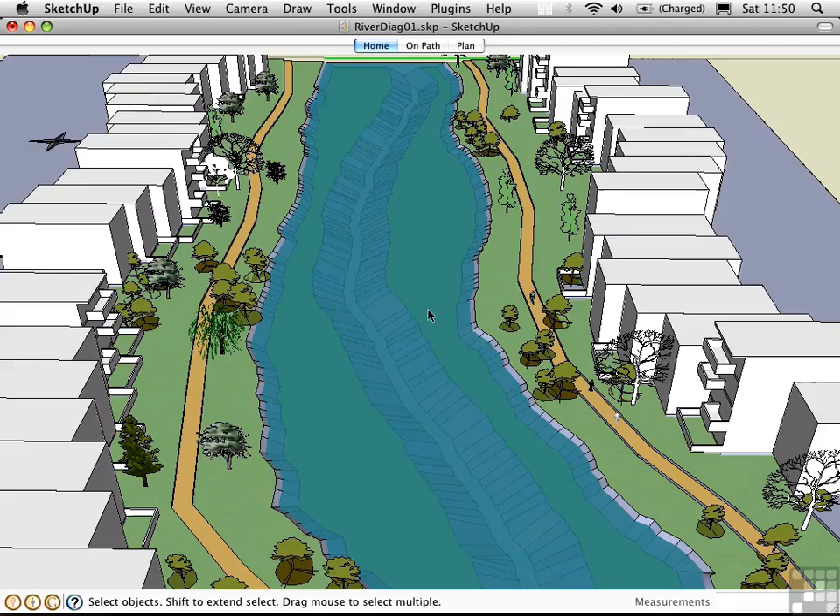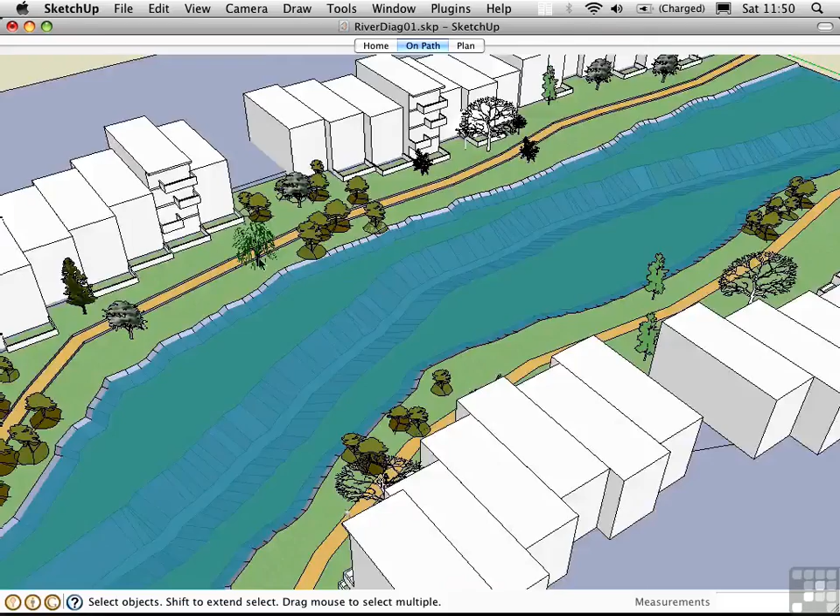As your models grow in complexity, there will come a point when the on-screen performance is degraded. And you can see this a little bit here in this model where as I pan and orbit, the smoothness is compromised. It's kind of jerky or jumpy. And if I switch between scenes, it's not really very smooth. It's more like a stuttery slideshow.

This is happening because there are too many edges and faces in this model for my graphics card to handle. Of course, I could go out and purchase a more expensive graphics card, but I'd like to show you some techniques that will help you get the most out of your existing hardware.

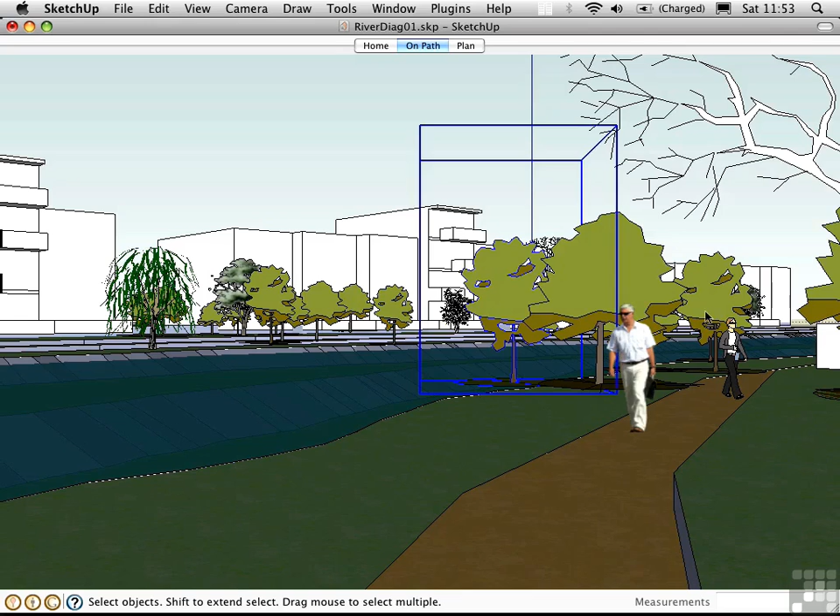The first tip is to use components rather than groups for repetitive elements. If you look closely, you'll see that there's the same tree here, here, here, here, and so on. This is actually a single component definition. So SketchUp only has to remember the number of edges here one time. And then it has to remember the different places to locate that component. That's far more efficient than remembering a unique set of edges each and every time.

So simply by using components, you're saving a lot of memory in the graphics card, and you're making your file size smaller. The second tip is to keep a close eye on the number of segments in your curves, or you can quickly blow your polygon budget for the entire model. For example, I'll draw two circles here on the ground. One will have 12 segments, and the other will have 36.

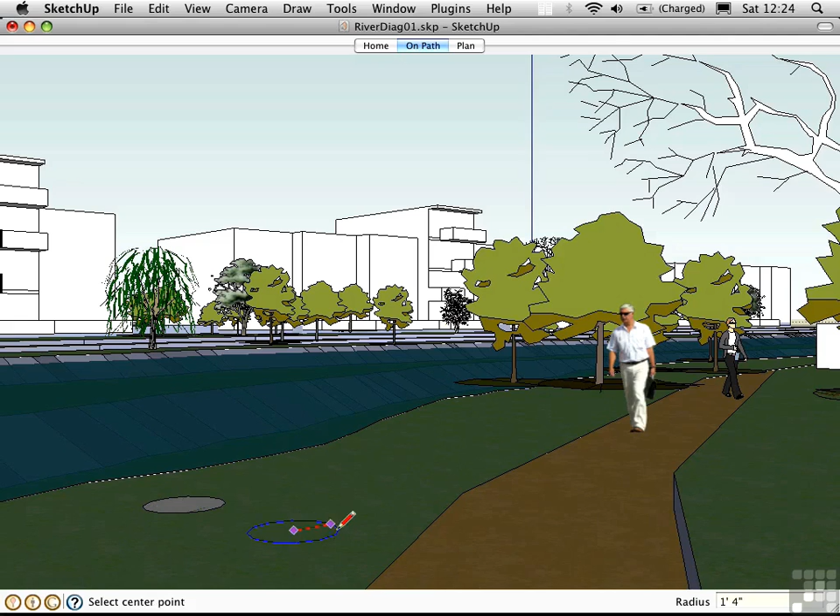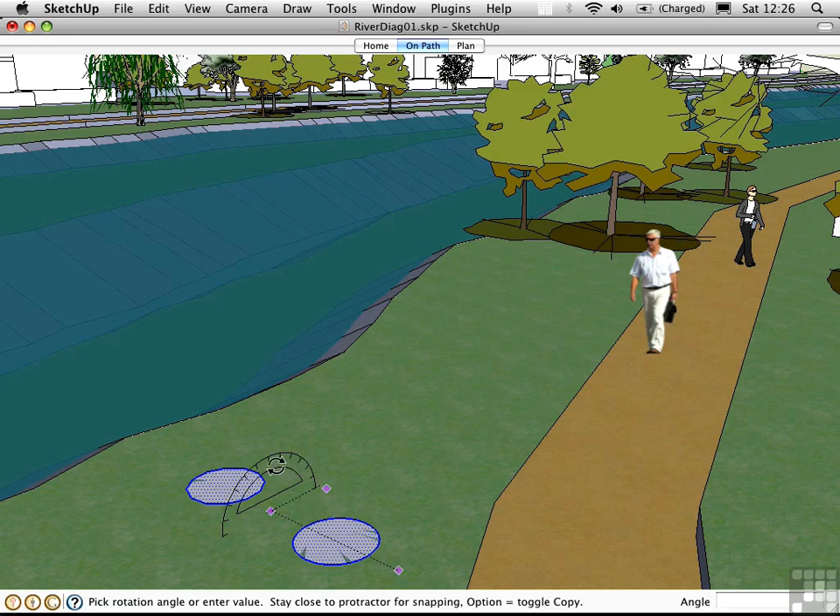Now, if I were only modeling a circle, the 36 segment circle looks better because the edges are smaller and it has more of a smooth appearance. But if I'm going to go beyond just the circle and turn it into a three-dimensional object, that's where I can quickly blow my budget. So for example, I'm going to select these circles and rotate them up 90 degrees. And then I'll draw an arc from roughly the center of each one over here someplace.

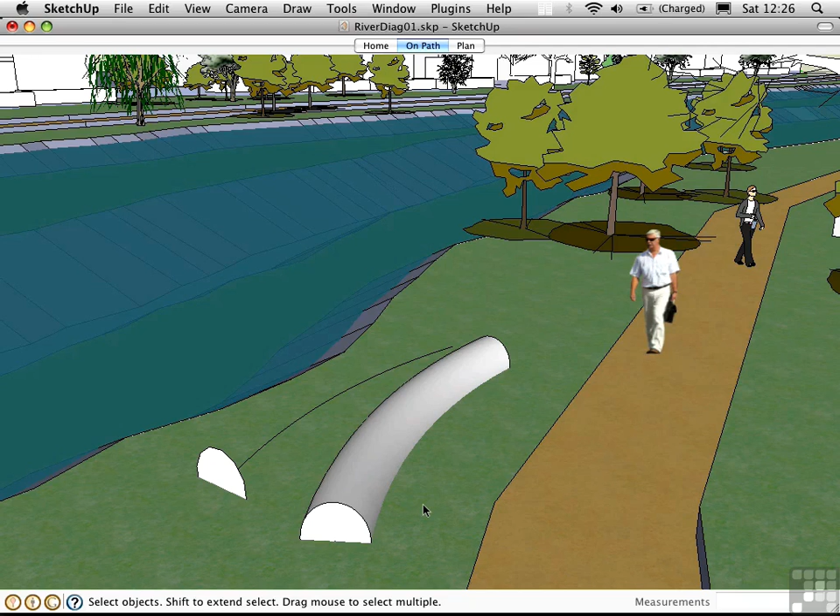I'll pre-select the path, press F, and click on the face to create a three-dimensional object. This actually greatly magnifies the number of faces that we have. We can actually measure that in statistics. Let me undo, go into Model Info, Statistics, and I can see the number of edges and faces that are currently in the model. If I go ahead and add something here, we go from 89,000 to just over 90,000, so that's like 1,000 edges that we've just added.

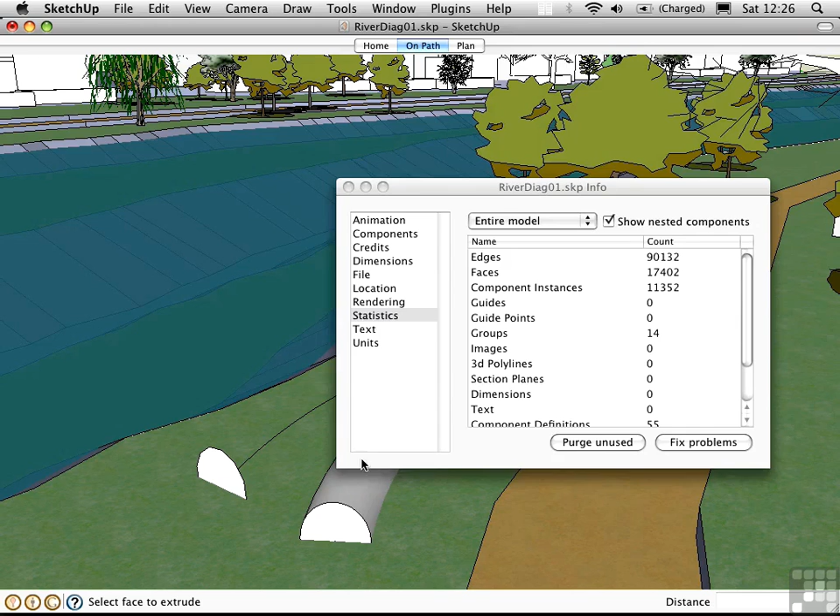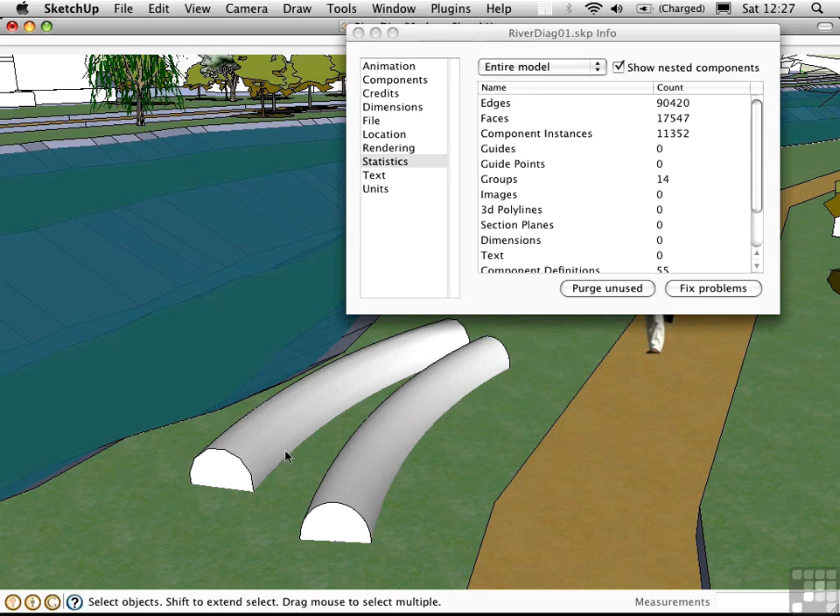Over here, we have the same type of thing. I'm going to pre-select the path, press F, and then click on the face. But we only added a few hundred, and the objects look just about the same. The reason for this is the surfaces are smoothed, so it gives you the illusion of curvature without having to pay for all of the additional edges and faces.

Another classic example of this phenomenon occurs with handrails. People often create nice, smooth cross-sectional profiles for their handrails, and then when they use the Follow Me tool to create a complex path, it blows the polygon budget through the roof. A much better approach is to keep it very chunky in profile, and when you go ahead and extrude that object out, it will have fewer faces and edges, but it will still look good.

My third tip is to purge unused items from your SketchUp file. You've already seen how you can purge unused components in the Components window, and unused layers from the Layers window. Well, right here in Statistics, there's this very convenient button that purges all unused components, layers, and materials from the model. I'll click on that, and we got rid of some information here that we're not even using. This will make the model more efficient and give the file a smaller size.

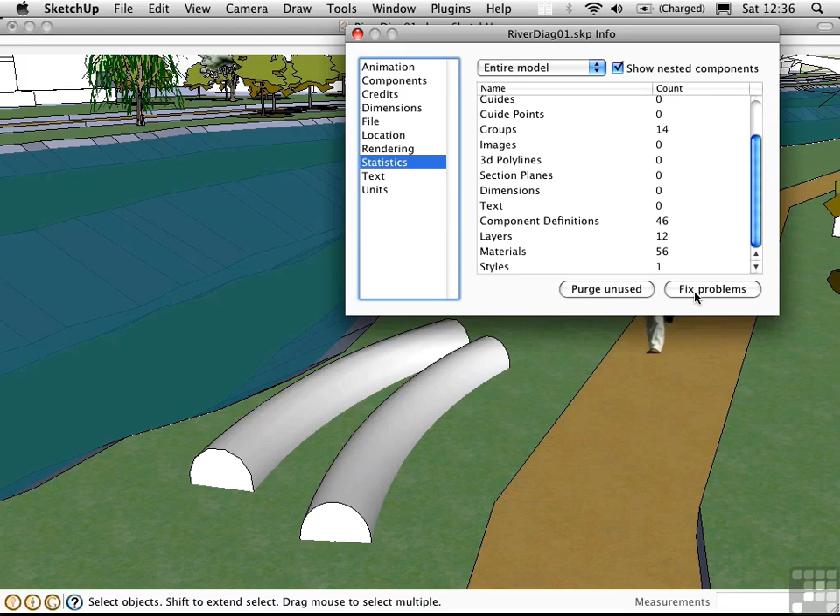There's also this Fix Problems button right here. And I wish more programs had this type of a button, but basically what it does is it tries to correct any internal issues that the file has. And all 3D programs eventually do develop these kinds of bugs. I'll click Fix Problems and it's going to do a validity check and tell me if there are any problems and fix them if there are.

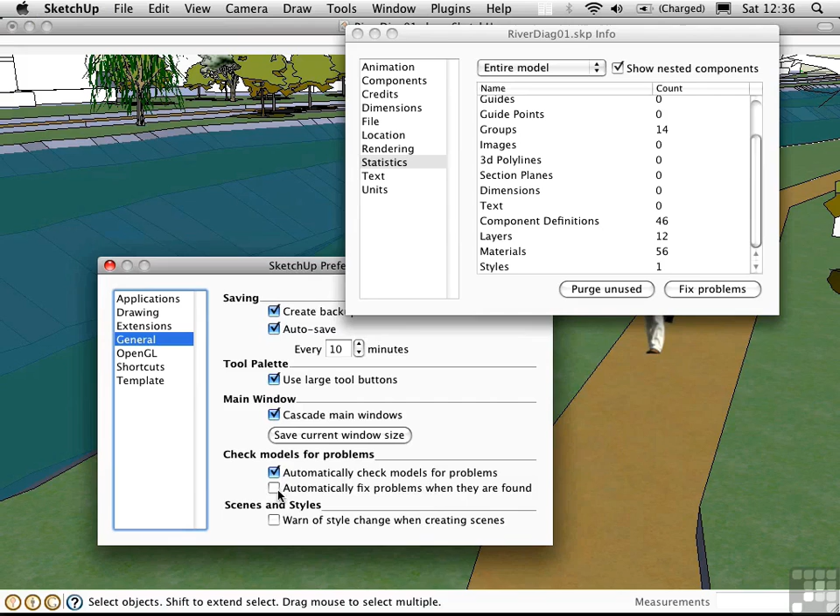There's also a preference for that, located right here. You can have SketchUp automatically do a validity check and actually automatically fix the problems when they're found.

This works most of the time. Problems don't develop very often, but when they do, come in here and try it. I have had files where this did not work and the file became unusable. So for that reason, I recommend saving your file periodically under different numerical extensions like Project 01, Project 02, and so on.

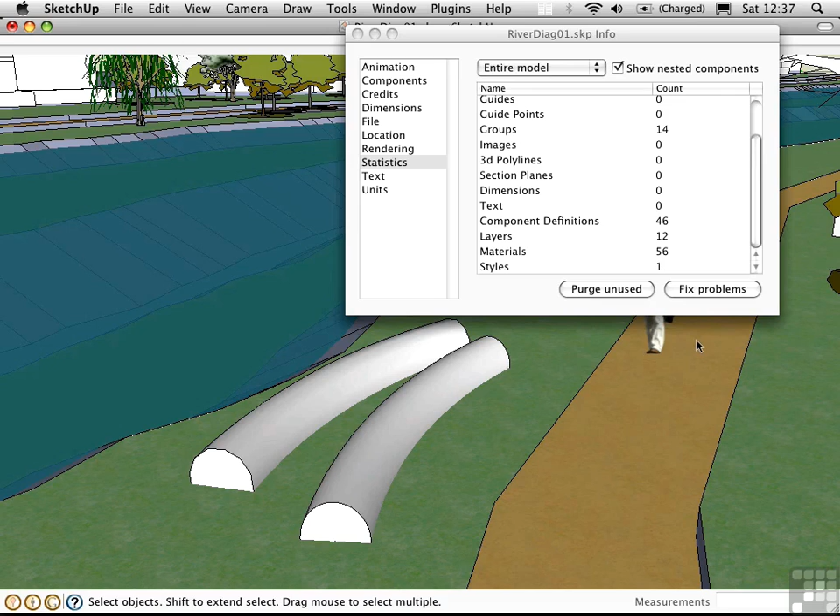My fourth tip is to manage levels of detail with placeholding components. Take this tree over across the river, for example. It's a three-dimensional representation, and so it has lots of faces and edges in it. This one tree might be responsible for a lot of the slowdown that I'm experiencing with the navigation.

One thing we can do is represent that tree in a simpler way. I'll do that by drawing a polygon at the base of the tree trunk, and I'll make it approximately the size of the tree's canopy, and then push-pull it up.

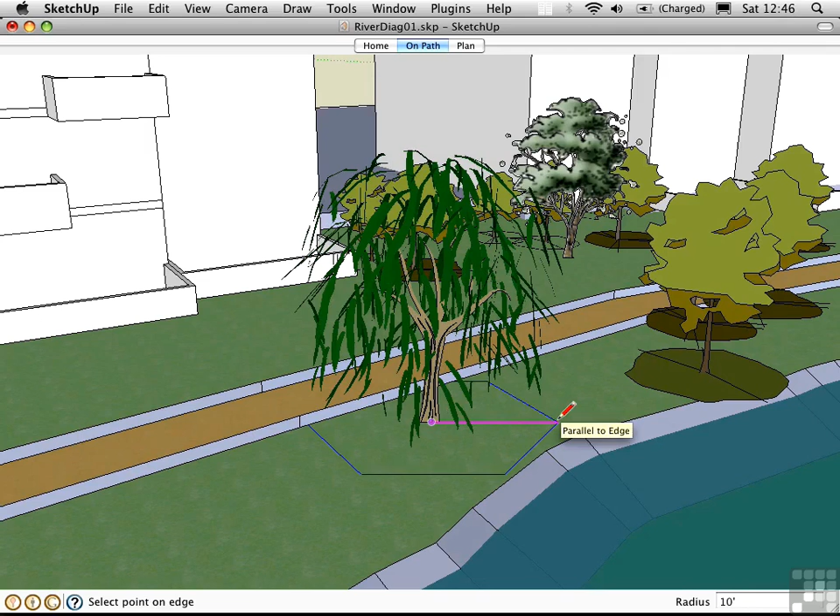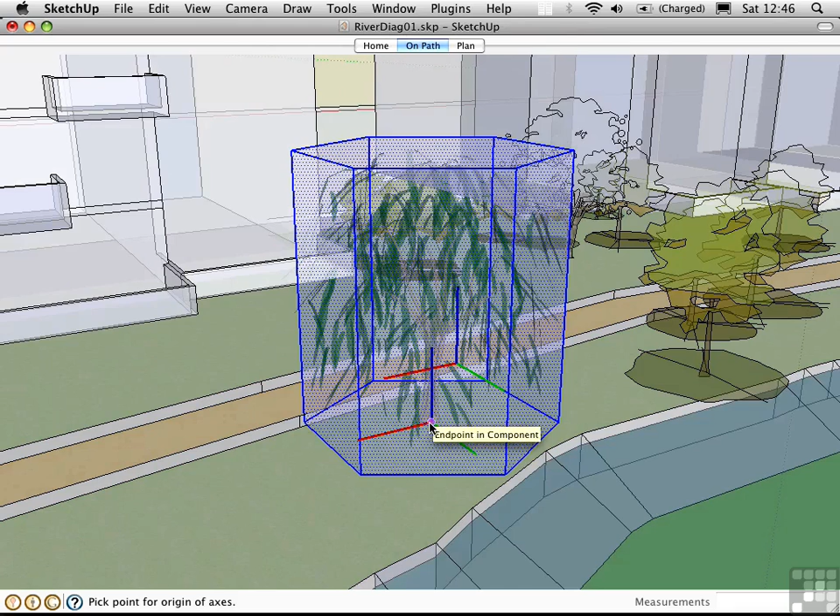Triple-click to select All Connected, and press G to make it a component. I'll call this Tree for lack of a better name. And then I'll set the component axes. I'll go into X-ray mode so I can see the approximate center. I'll click there, and just set in the axes. I'm going to keep them the same orientation as the original axes. Then I'll just click Create, get out of X-ray mode, and then delete the component.

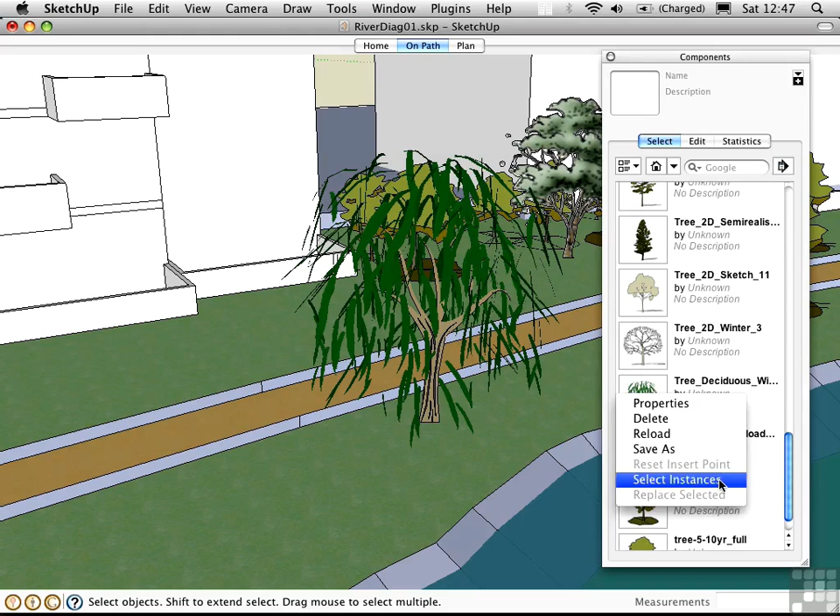Open the Components window, and track down this component. It's this tree deciduous component right here. Right-click and choose Select Instances, which will select all of the trees like this in the model. Then I'll go up here and locate the tree that I just created. I'll right-click on it and choose Replace Selected. So now the tree is represented by this low poly object.

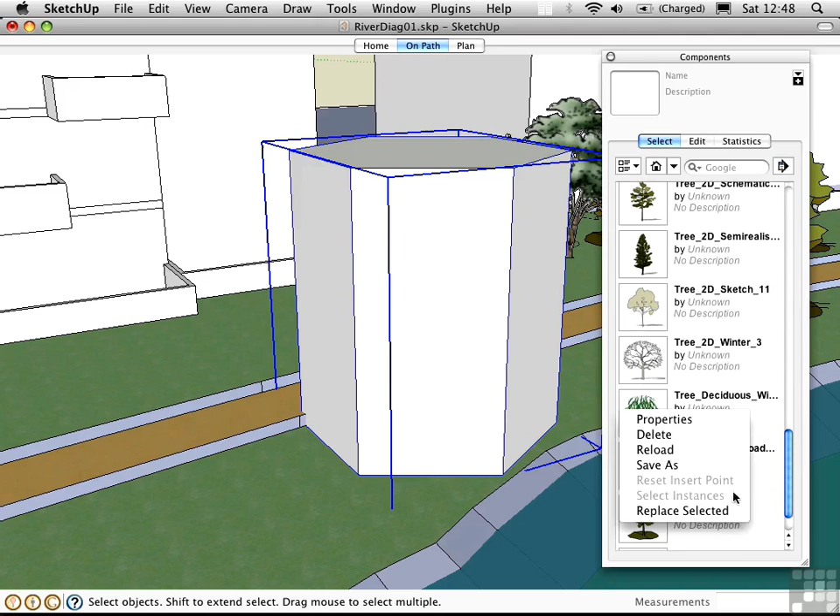Now I can go ahead and keep working, and the graphical performance should be improved. Later on, when I'm ready to make a rendering, I can go ahead and come down here with this object selected, right-click on the tree, and choose Replace Selected to get the high poly representation back.

An alternative, more global approach is to have both components coincident at the same time, and then use layers to toggle their visibility. I'll open the Layers window and create a low poly layer and a high poly layer.

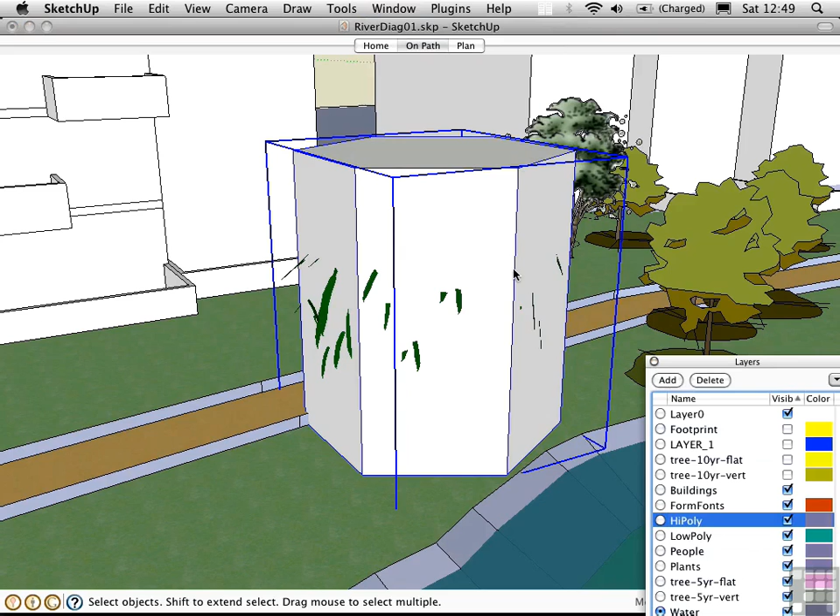I'm going to open Entity Info by pressing Command I, and I'll place this low poly object on the low poly layer. Let me just turn that layer off, and then I'll select this tree and place it on the high poly layer.

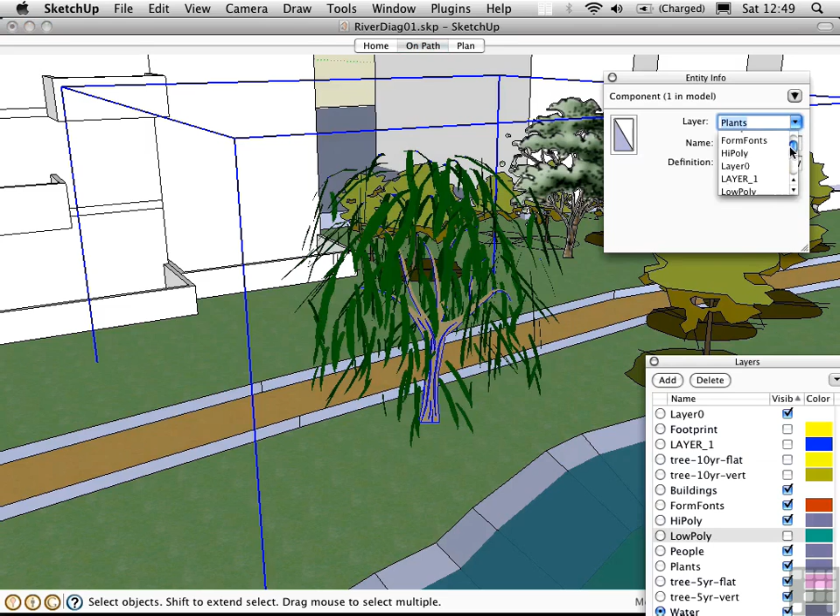Now I can go ahead and work in low poly mode, and I could do this to all of my components. And then when I'm ready to look at the high poly trees, I can just toggle the layers and get them all back globally.

My fifth and final efficiency tip has to do with texture maps. Let's go into Model Info and click on Rendering. There's only one option here that has to do with anti-aliased textures, which means when this is checked, SketchUp will try to smooth out any jagged pixels that appear in your textures.

This tree over here is a photographic component that represents the foliage with this image. If I uncheck this, it doesn't look quite as good, but this is going to dramatically increase the performance.

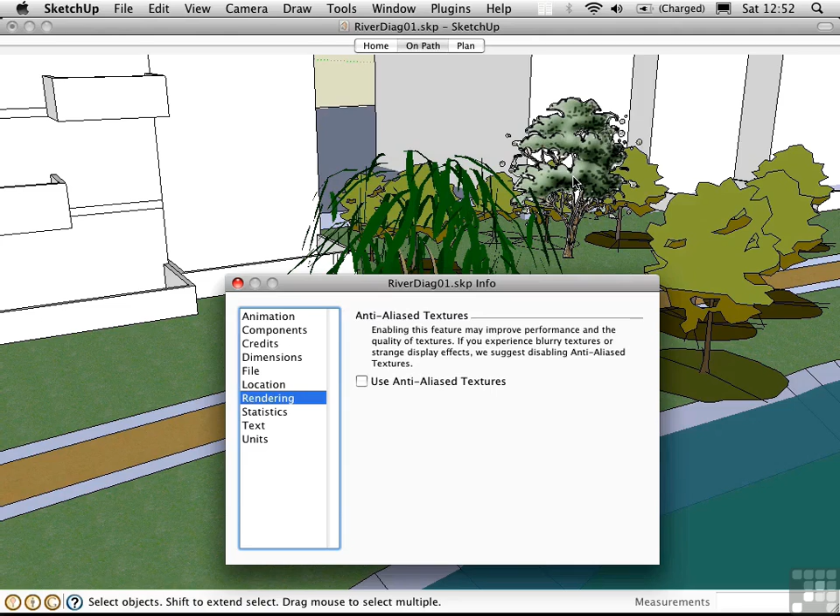Another thing you can keep in mind is that SketchUp won't display textures that are larger than 1024 by 1024 pixels on the screen, so there's really no benefit in using texture maps bigger than that. One technique is to create texture maps that are bigger than that, and then downsample them to 1024 by 1024, and that generally has the effect of anti-aliasing. You can do that in the texture map itself, and then you don't have to have SketchUp perform this calculation, which slows down the graphical performance.

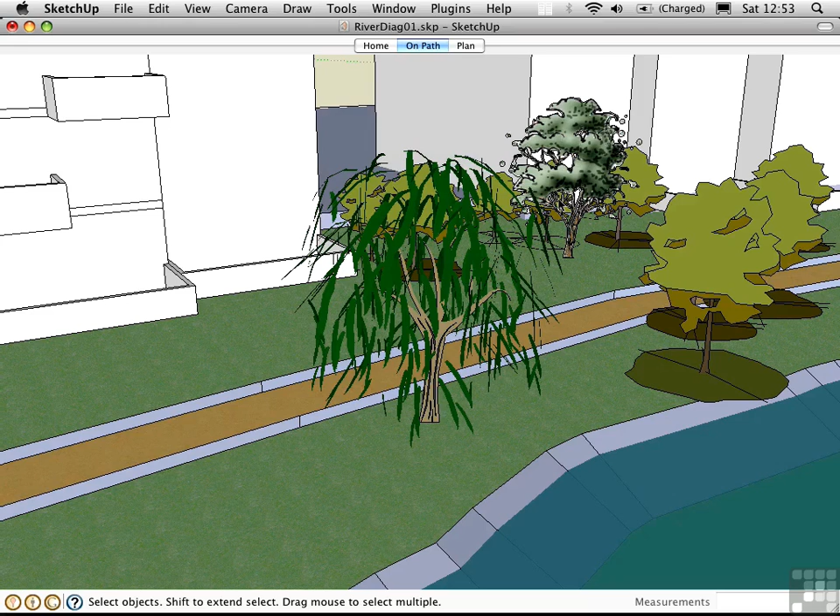So there you have it, lots of tips for modeling more efficiently with your existing hardware.